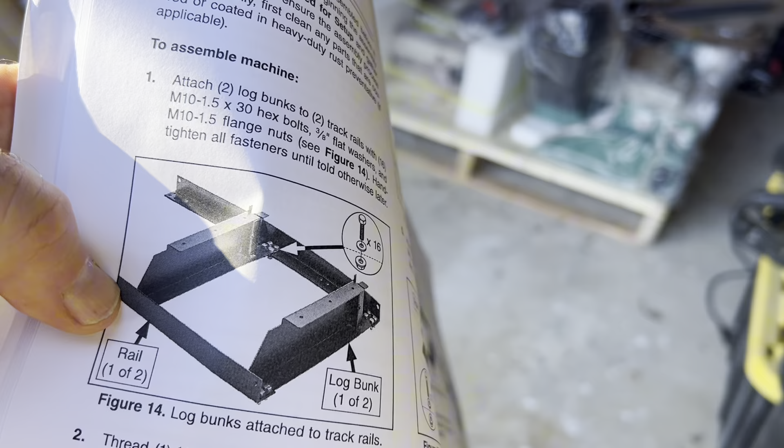All right, I think I got that laid out now. We can kind of see how things go together.

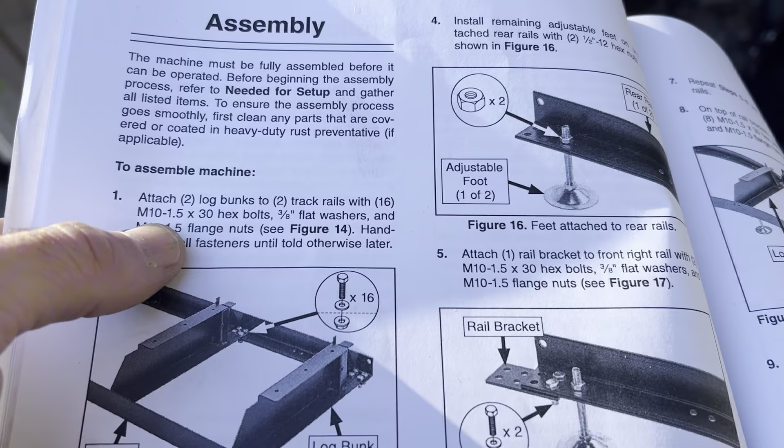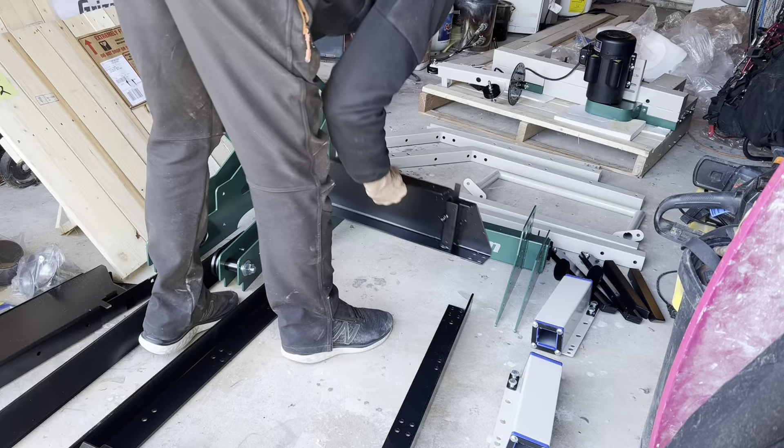Step one, we're looking for the 2 log bunks and 2 tracks with these bolts, the M10 1.5 times 30 hex bolts, and 3/8 flat washers. I'm going to place this one here and that one there.

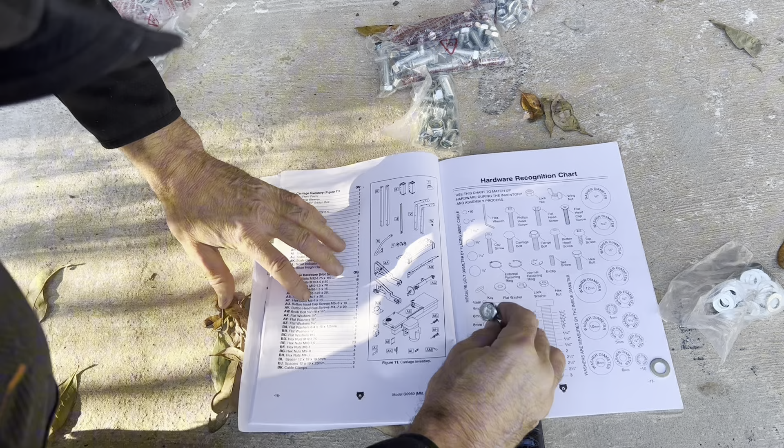We'll hang this over and do this here. Right now I'm just going to get them installed, and then I'll turn this back on. I've got to move this one to right there, so that's where that one's going to go in.

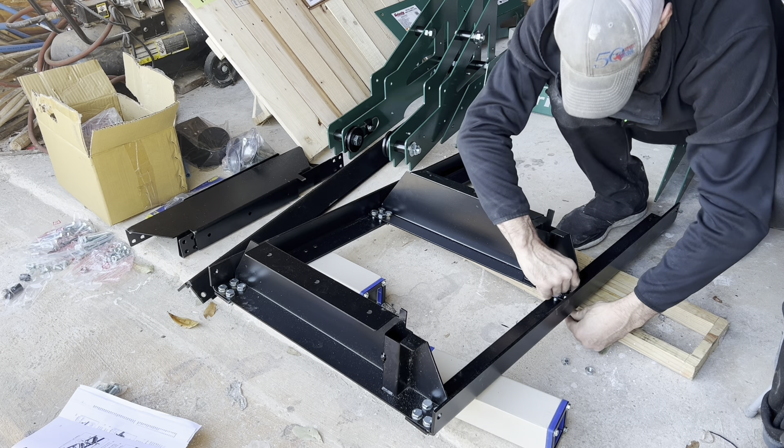I'm going to go ahead and do it now so I don't forget in that orientation. Expand from there. It'll make it easier to get these hand tight, so we'll do that real quick.

That'll also let us get those legs on there that need to be adjusted. We'll do that, and then we'll move to the next step.

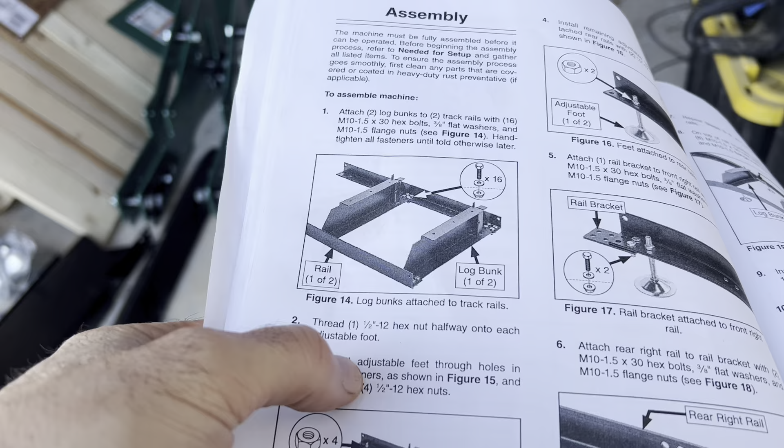This thread, 1/2 inch, 12 hex nut halfway onto each one. We did that, and now we need the adjustable feet. The nuts that we just completed have a single bolt.

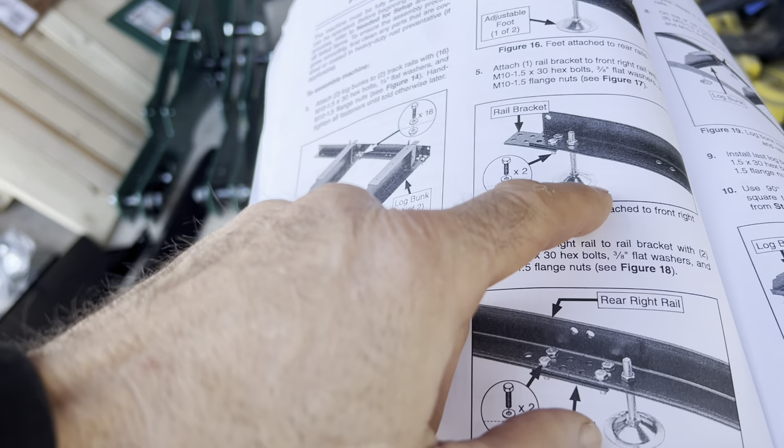So we're going to put that in there. This is going to be the adjustable feet.

I'm going to get my other jacket. It is getting cold out here.

Looks like there are 4 adjustable feet that go on this, and we have 6 here.

These are the nuts that adjust up, I believe. Nope, they'll stay there. All right, there's 4, so these other 2 will go somewhere else.

Let's find, I think those nuts are right here that go with it. Go ahead and get 4 of those. There we go. We may need more than that, so I'm going to put those right there for right now.

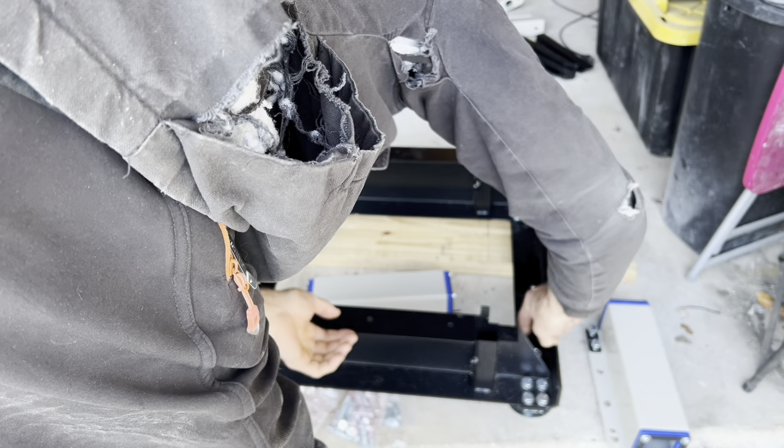I'm going to insert this here down to that bolt that's at the halfway point and run these other ones down. All right, good.

So we were looking for the rail bracket, and there's 2 of them, and they're in this container here. This needs to go underneath. We'll slide those on, put that nut on this one, and then do the same thing opposite side.

Those are not tight yet, just finger tight. We're going to take that other rail and just repeat those steps.

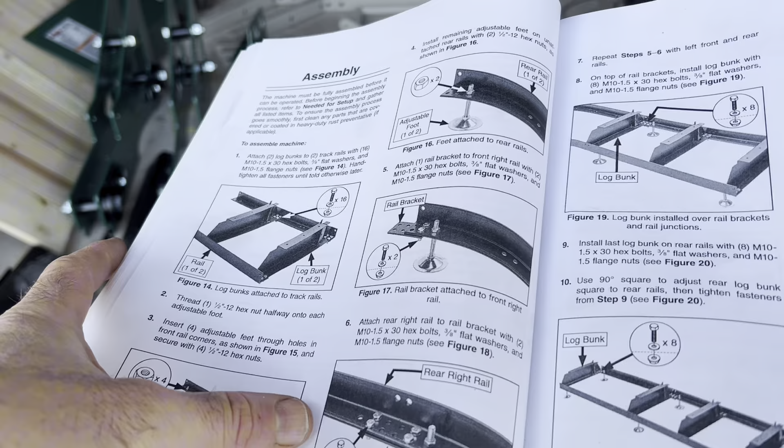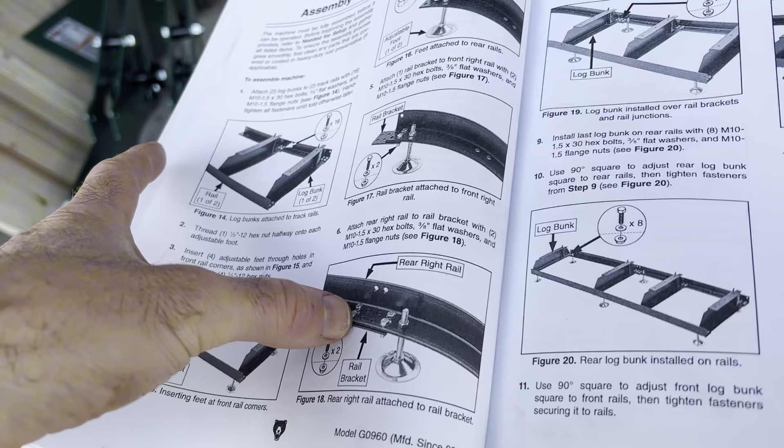Because that other log bunk is going to go right here on those 4. So we're going to bring these bolts as far away to leave 4 in the center for that log bunk.

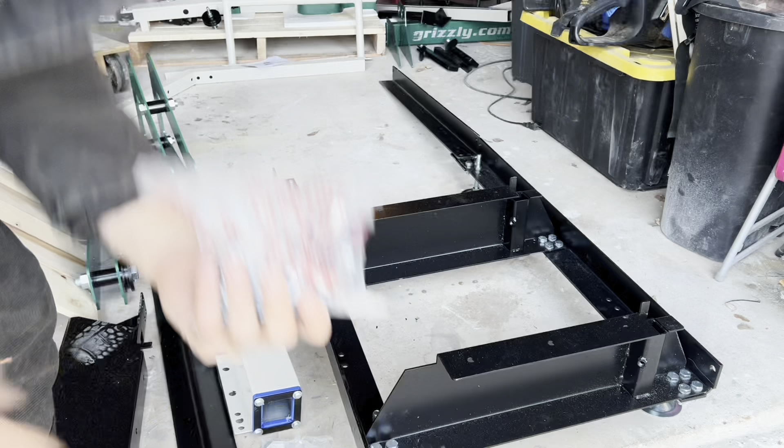These have to go, and we have to leave the 4 in the center open. All right, there we go. Here, and we're going to place it right around in there.

So we're going to install the last log bunk, same bolts, and then use the 90-degree square to adjust the rear. So we haven't done that. We'll go in and square all these up.

Right here, I want to do that before I put the log bunk on because it showed it in the illustration.

And then we'll run this other one down on top of it. We can use those to adjust later on where we're at, and the distance from this and the ground.

Let's go ahead and get that log bunk on there, same orientation as the others. Place that in there.

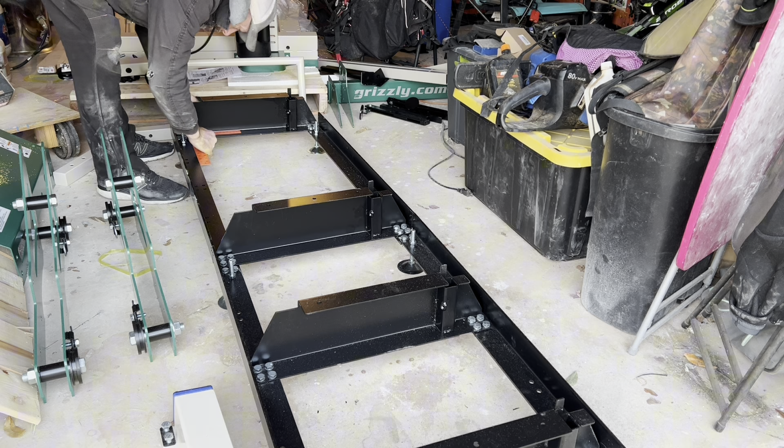Tighten it down, that one needs to be adjusted that way. May have to place them in here, I need something kind of flat. I want that to flatten out, and then we'll tighten that down once we get everything squared up. I've got a couple different squares, in case one doesn't fit I can use this other square, and we'll tighten those down as we get the edges square. That's probably where we're going to stop today because we're losing sunlight. We'll work on this some more tomorrow.

Top part of that bolt is a 17, bottom one's a 14. There we go. So I'm going to tighten these down. I have to use that as a check there. So I'm going to do this other side, get everything kind of squared up, and then as I do that I'll tighten them down. There we go, that's better.

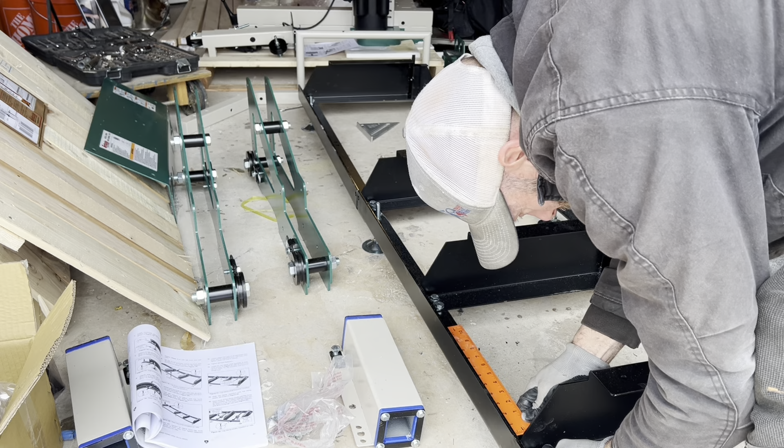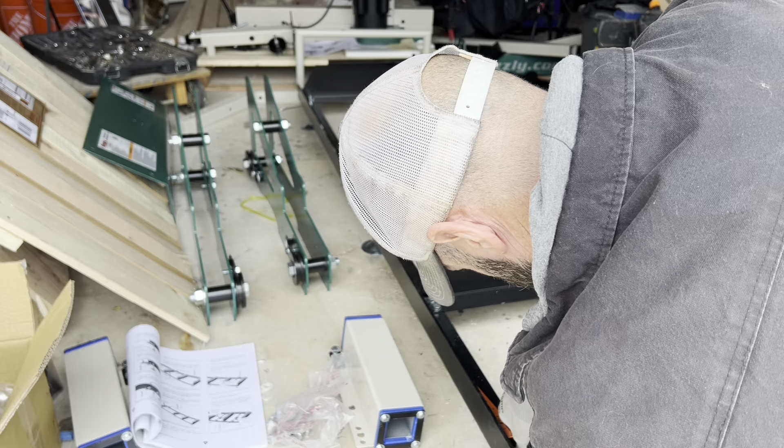So it'll take a little bit of adjustment to get these square, as square as we can. I'm not even doing these finger tight right now, just slightly tighter than they were. And then I'll try to get these squared up. Right there, that looks good on this. So I'm going to try to tighten them a little bit more by hand, see if that'll hold that position. And then I'll go get my wrench and do it here too. Yeah, that looks good, okay.

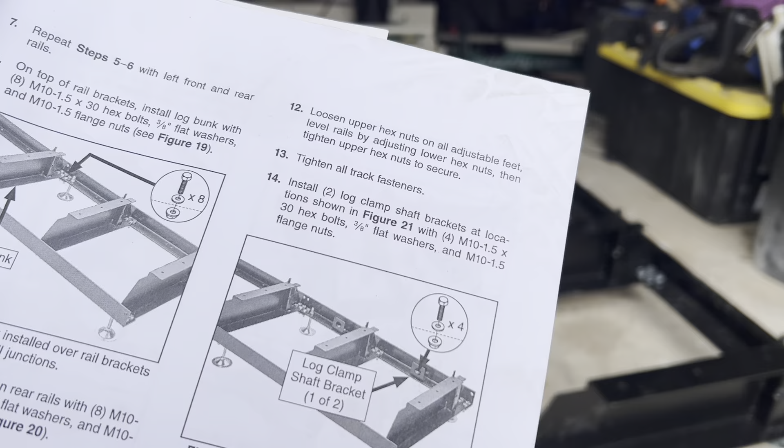I'll take a level when I get to its final location in the garage. So now we're going to tighten all track fasteners, which we did. We'll tighten those down later, the levels. So those adjustable feet, we'll tighten those down later, because like I said, we still have to move it.

Now we're going to take the log clamp shaft brackets on number 14, and it shows it in figure 21 where those go. So we're going right over here and right over there on these two that are closest to us, we're going to get those installed. The flange nut, and run it down here. Let me go ahead and tighten those down. We are getting really close to using all those up.

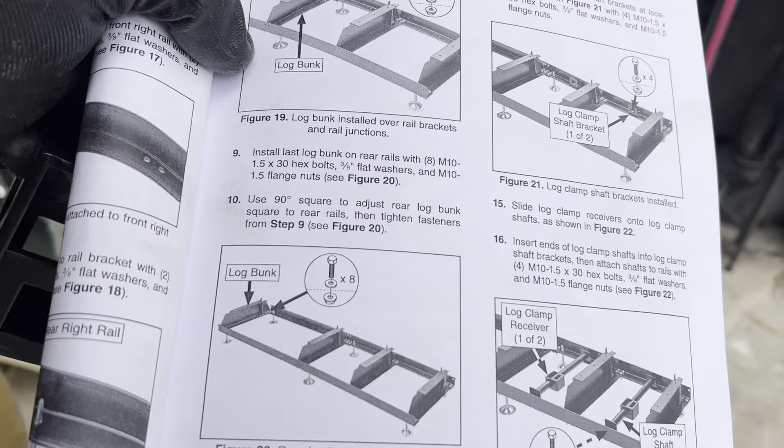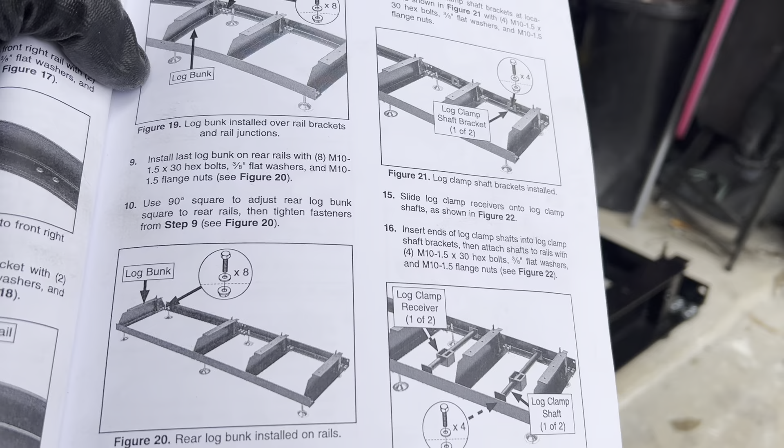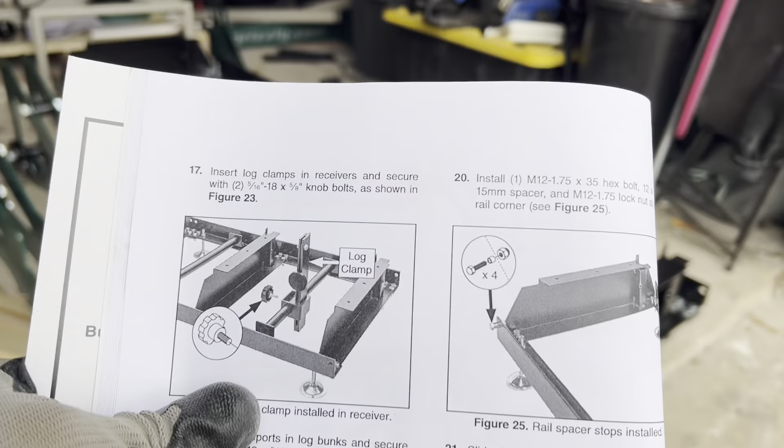We're going to take this log clamp receiver, one of two, same thing here, and we're going to run it on that clamp shaft. So that's not going to stay in place like it shows in the figure. That's going to slide in here, and that's going to go there. Same thing with those over there, because I didn't know how much I was going to have to move them around. We'll tighten these down in just a second. There we go, those are hand tight. There's figure 23 where my thumb is.

We're going to take these, they're shown right there. We're going to insert that log clamp like it's shown. I believe these go in there. Here, slide that down in there. That looks like that'll kind of hold it in place, but I'm going to run this down, kind of cinch it in, show you what it looks like.

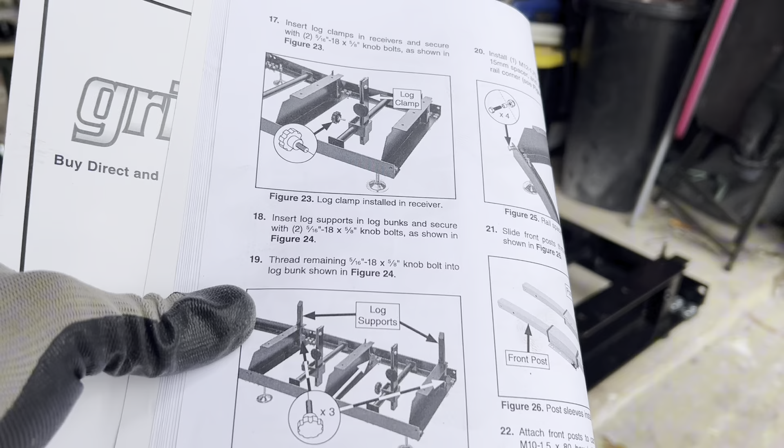So these are the log supports here, it says we're going to need 3 of these. We had 2 there, we're going to need 3. I don't see where the third one goes, but we'll figure it out. All right, so that's going to go in there, that's going to go in there, this one's going to go up here. That one's going to thread in. Looks like it's just squared tubing if I didn't get them.

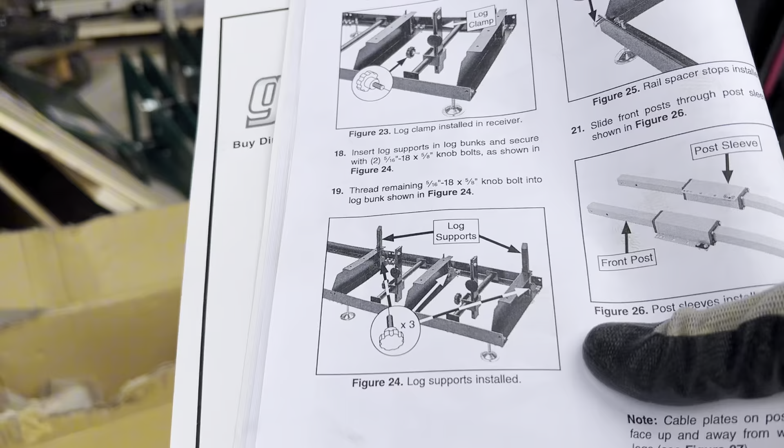I've got the nuts here. That goes in there. I'm going to put this one in for now until I find the other one, because it did say 3. But I think I should have a 4th one for this longer part down here, but I could be wrong. All right, not a big deal, I'll look around for the other one, see if I can find it. Because it only shows 2 here in this illustration, so maybe it only comes with 2.

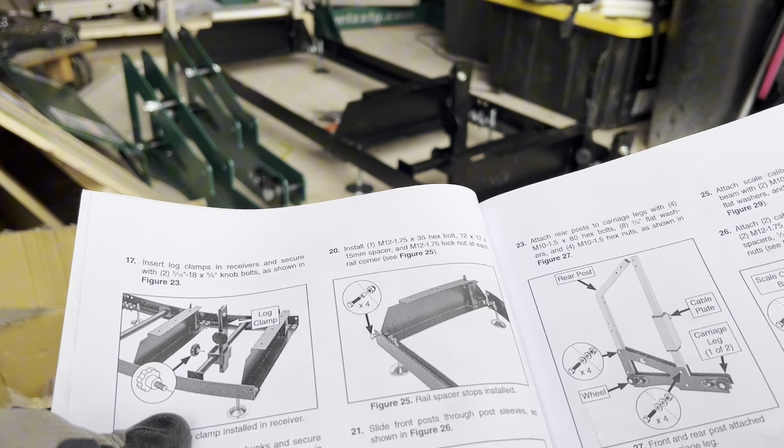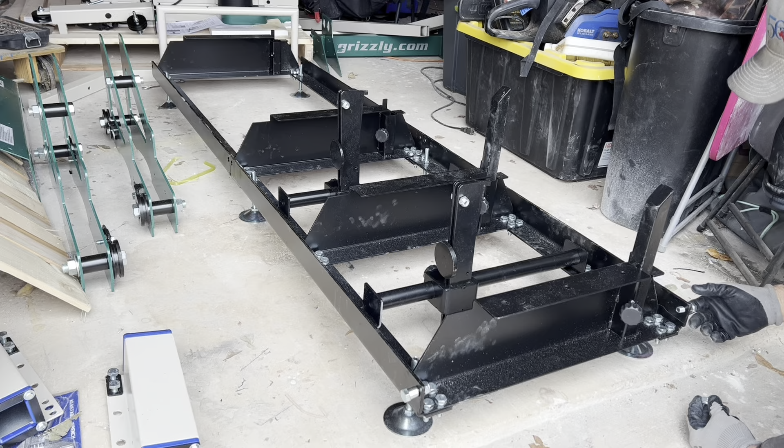We're gonna install an M12 bolt, looks like there's 1 of them, and it's gonna go further down towards the end, the one that doesn't have the other log support, the furthest one. Oh, right here, I bet you it's one of those. That looks like an M12, that's a locking nut there. So this one's calling for the M12 bolt, 35 millimeters long, 15 millimeter spacer, and a locking nut. Those were all in the same bag. Looks like there's some more right here. Bolt, spacer on the outside, nut on the inside. All right, spacer, nut, there.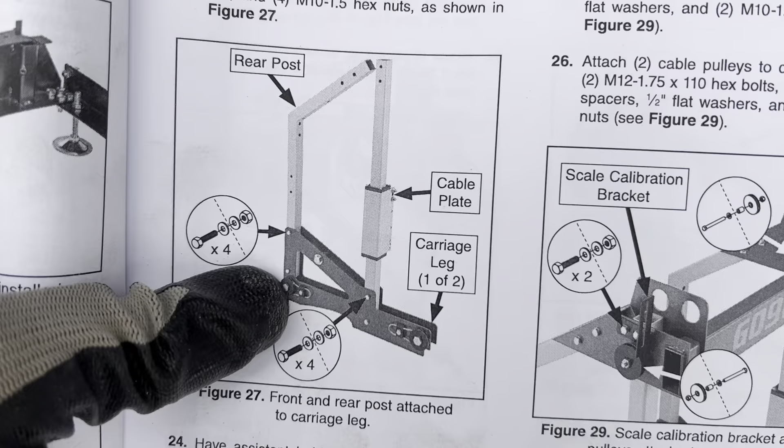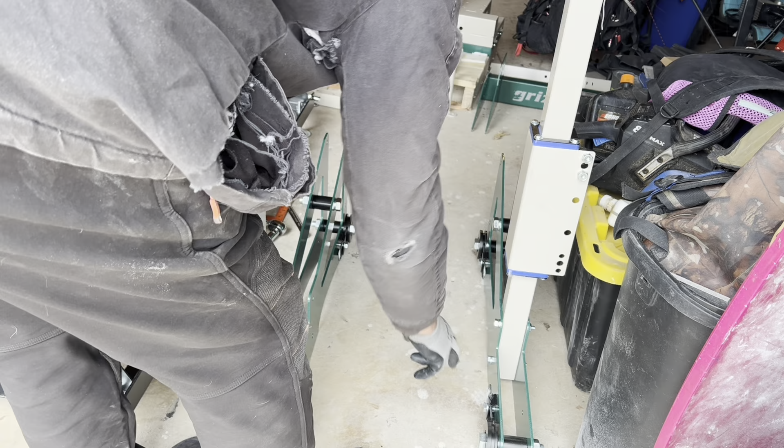We've got the majority of the base frame finished, and we'll run those down, we'll tighten those down. Got to go get these post sleeves. One that has the holes furthest apart here, the ones with the closer one, slide that down there. The 2 holes that are furthest apart on the bottom, on the base of that, right in the center, so that's a little bit easier to see. These bolts are on the opposite side from the cables. This is where the bolt started, it went through that direction. Slide that down.

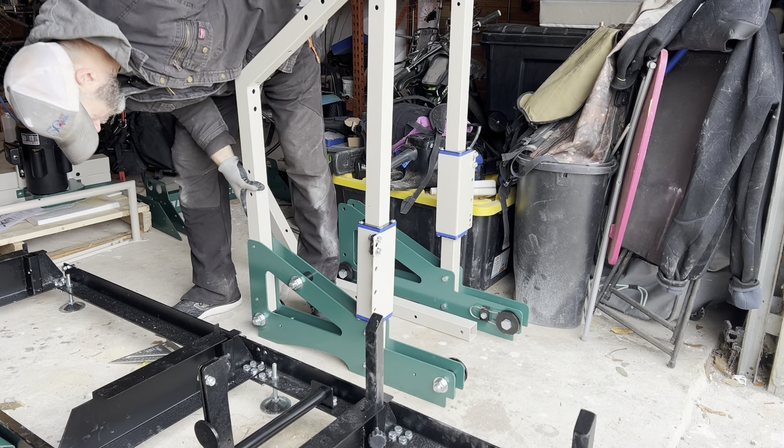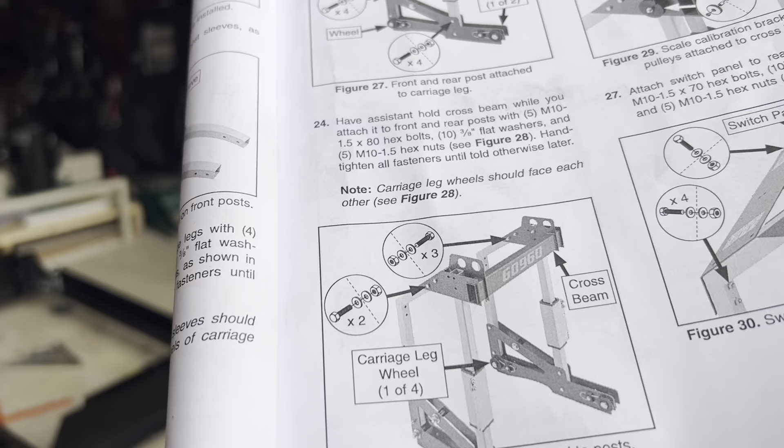All right, so now this says you need an assistant to help you hold this piece because it does look kind of heavy. I think it's going to go on like that.

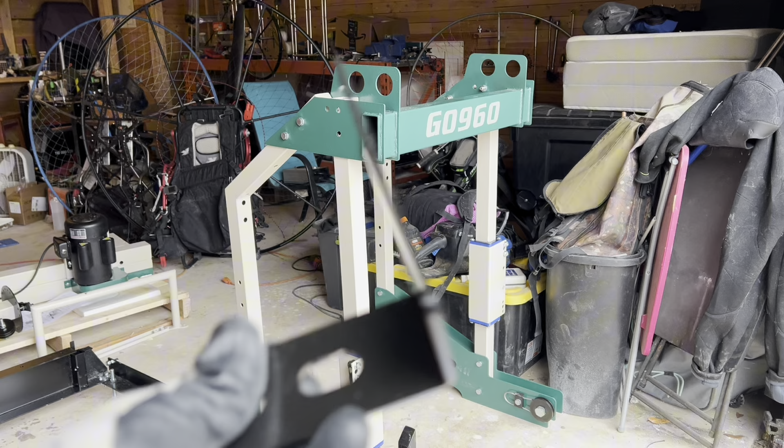So we just completed figure 28, which is step 24. Now we got to go attach the scale calibration bracket to the cross beam. All right, we've got the scale calibration bracket through there, and that one will go all the way through there. Cable pulleys to the cross beam.

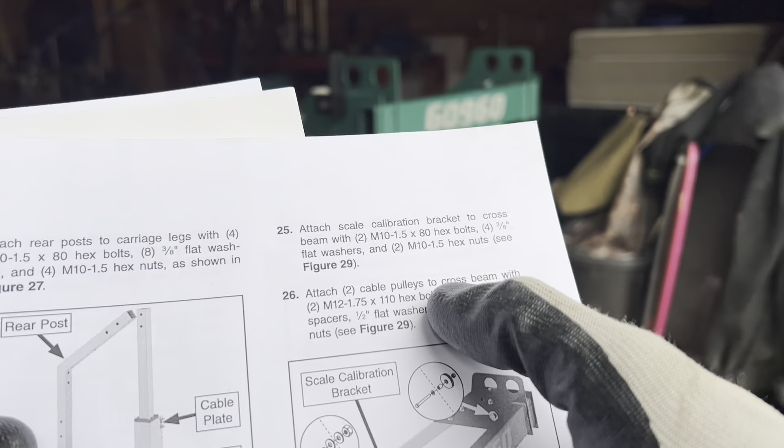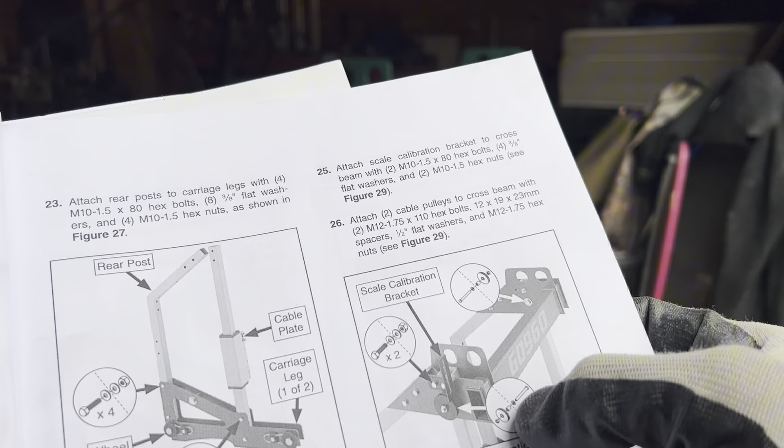These are going to be M12s. So if we go back to step 26, we need that M12 bolt, 110 millimeters long. But we need a spacer - I have to put that spacer on. So bolt with washer on this side, then the spacer, then the pulley, and then the nut.

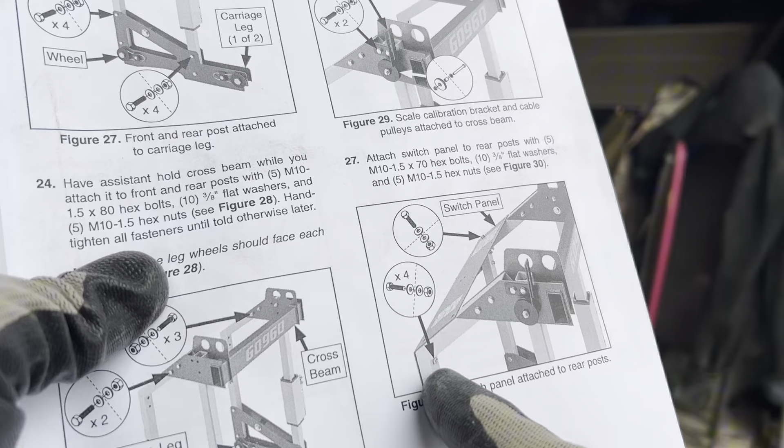On to step 27, we're going to put this panel on the back. You're going to have 5 of these bolts that are 70 millimeters long, so again M10s. I think they come in this pack here. That should be them, just so it kind of stays in place. That one goes there.

So we're going to attach a cable pulley to the right rear post. Spacer - that's that shorter spacer - pulley, and nut. It's going to have to go like that.

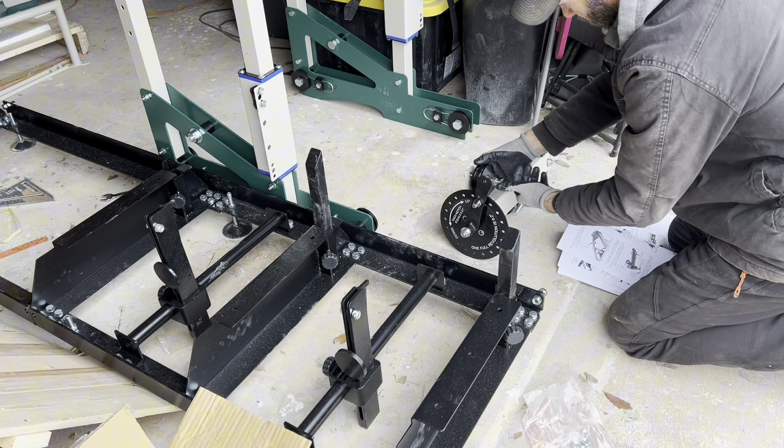So it says to remove that hex nut that has those 2 pulleys on top to this part, and take these 2 pulleys off, okay, and hex bolts from lift assembly. So these 2.

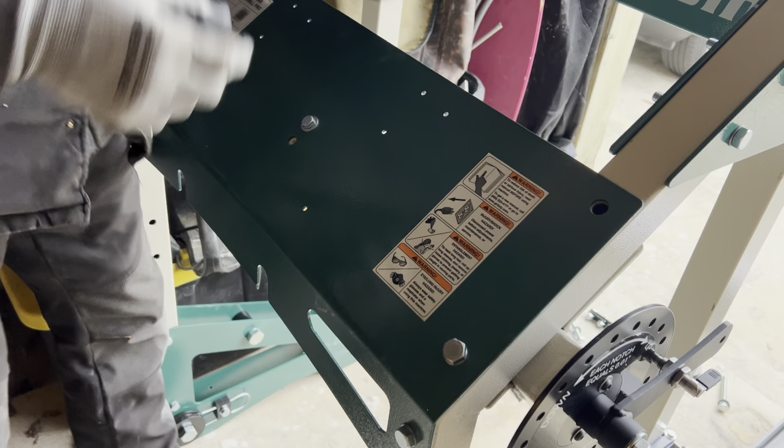All right, we'll put that back on. We'll get this as tight as we can by hand. There we go, so that's going to stay. So again, just hand tight right for now.

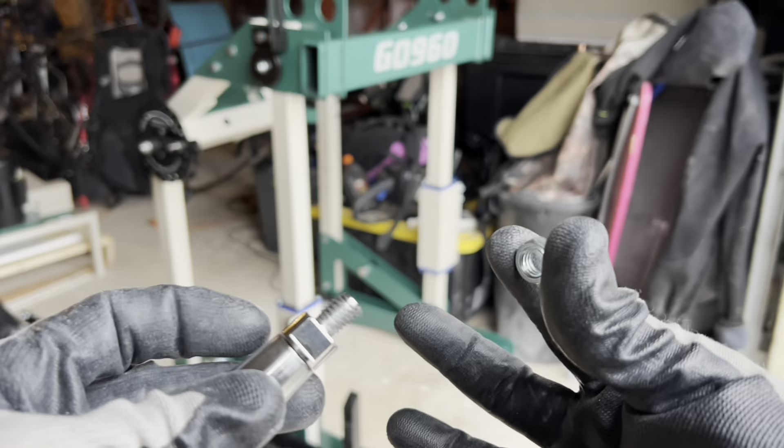I'm going to go back before I go too far and knock out step 30, and that's just putting this handle back in place, sliding that in. Runs down on the back part of it, putting that down.

All right, good, we got that back in place with the pulleys, and those pulleys are going to be right here mounted below. Bolt, spacer, pulleys, little washer that keeps the bolt from rubbing against the pulleys, it looks like. And then run that down. Hand tight for right now.

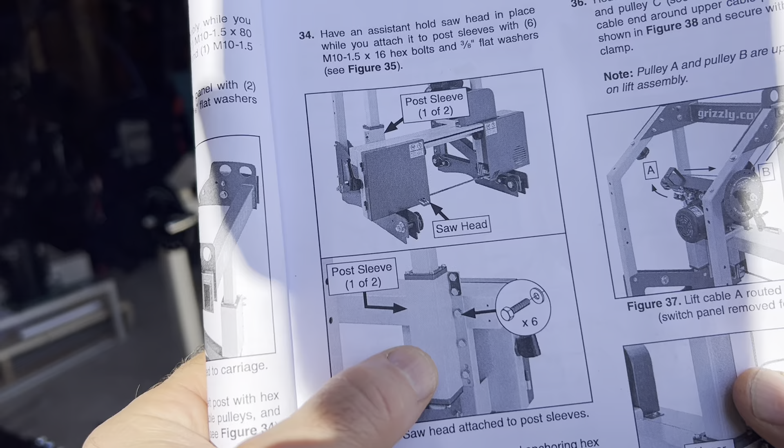Whew, all right, let's see how. All right, we're going to stop right there for today. We're going to have to get those aligned and bolted on.

Kind of in position - let me show you what I'm talking about here. So I'm on the back side of it, and what may be happening is this track here may be kind of turned out. I may need to bring it in some.

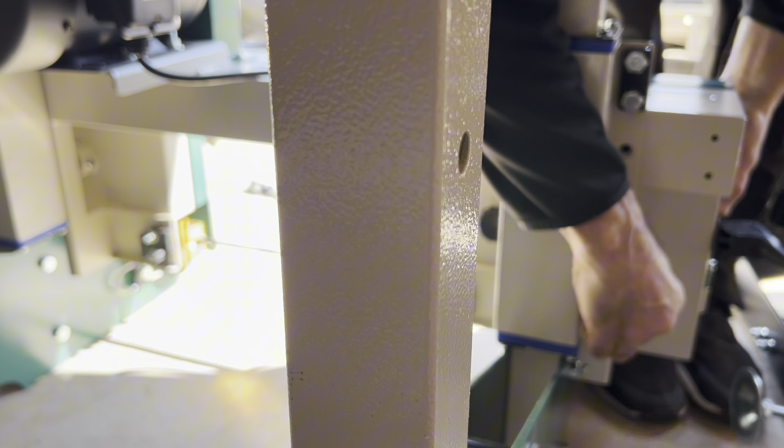And that might help align those bolts. Yeah, it did on that side. There we go, run that down. Run this one down, just make sure I'm not cross-threading anything. I should be able to run these down with just my finger. All right, this I am going to run down. There we go.

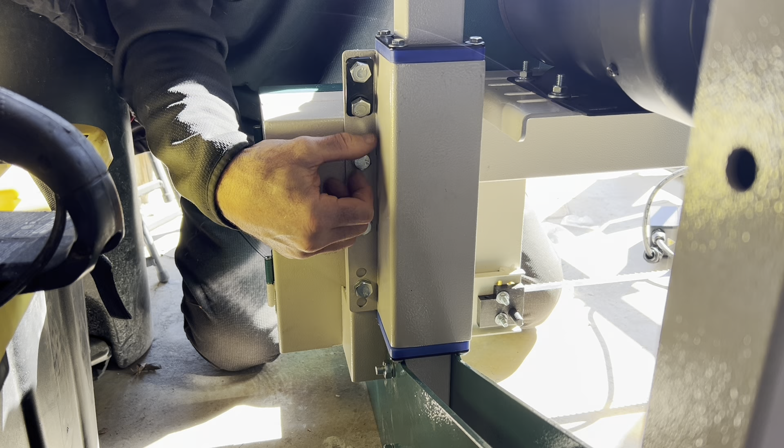All right, for right now, for what I need. Okay, so we got those tightened up. We're good to go, let's look at the next step.

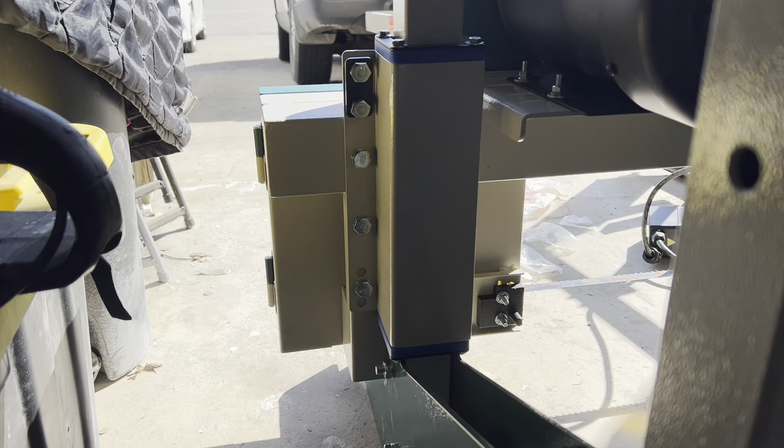So I've made a loop. In the illustration, it shows that these portions of the bolt - the head of the bolt - will go up. We got to put that washer back on. That slides back on, that slides there.

And now we're going to have to route this cable once we get this one on. So A's here, then we come back around to B. We go up to C, then we go down, and then we secure it to that side.

Through there, and I'll check and see if that one goes through the top one on this one too, or through the bottom one. Through here, and back down to this part right here. And that feels like where the bend is.

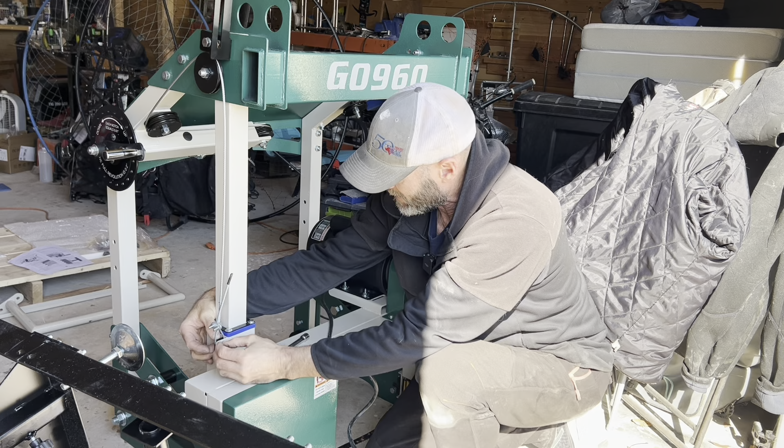And we may have to adjust the tension of that. Right now we're just getting it in place. I don't know if you can see that from there.

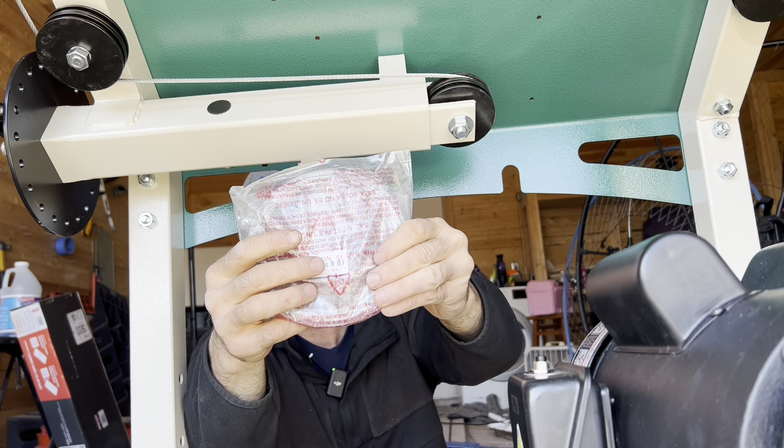Cable B, I'm going to run it through. I'm going to flip it around, run it back down there. And then we'll bring it to the point that they already had kind of bent, try to get it right there at that same setting.

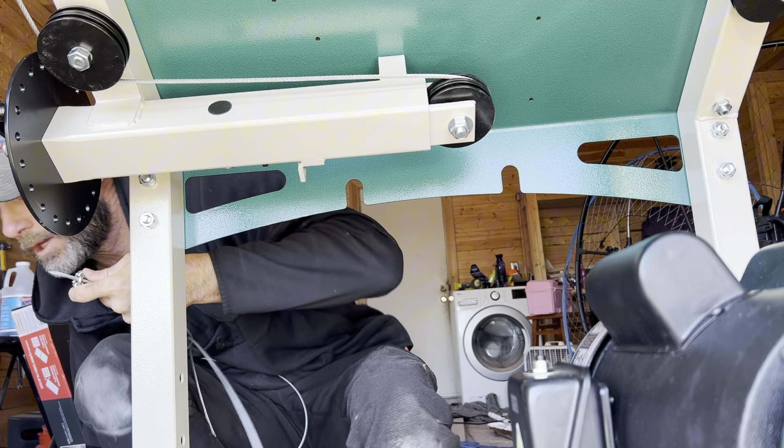And then I'll run that down. I got to get my tools. I'm going to have to wrap around here, but I've got to look at the direction it's going to go. I may have to shorten that.

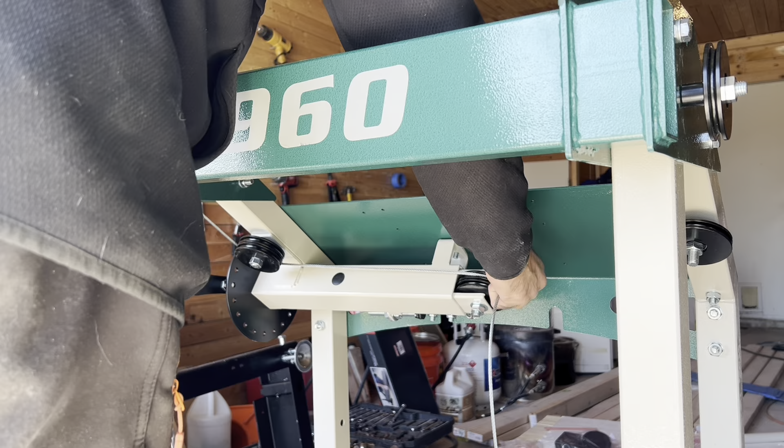Around D, we're going to come around here, go around E, which is the bottom one. We're going to come across and go F. We're going to come up and go G. And then we're going to come down here and we'll put that other cable clamp on.

That feels good. All right, so this, we're going to install the push handle.

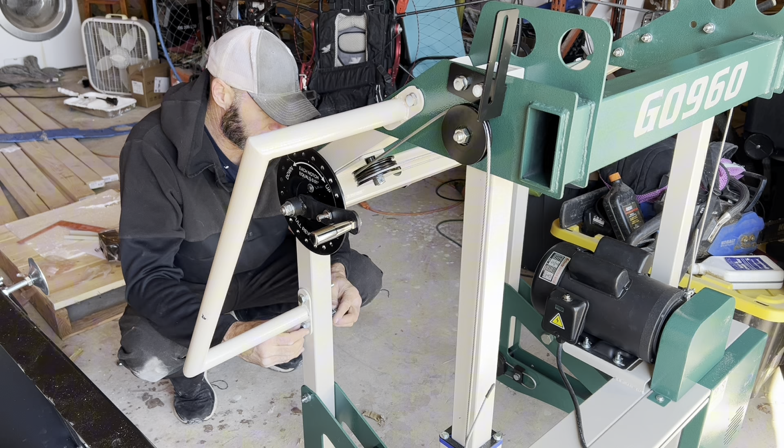All right, so we got that. I'm going to go ahead and tighten some of these down since we got those on. That should be a 17 millimeter. We're going to have to go around and tighten all of them, but

We'll go ahead and get some of these snugged up. We're probably still going to have a lot of adjustment on here because I doubt that I got everything tensioned just right, but we'll find out later on. Right now, let's just get it assembled, and then we'll do all the tensioning and everything else later on. There we go. All right, got that tightened down.

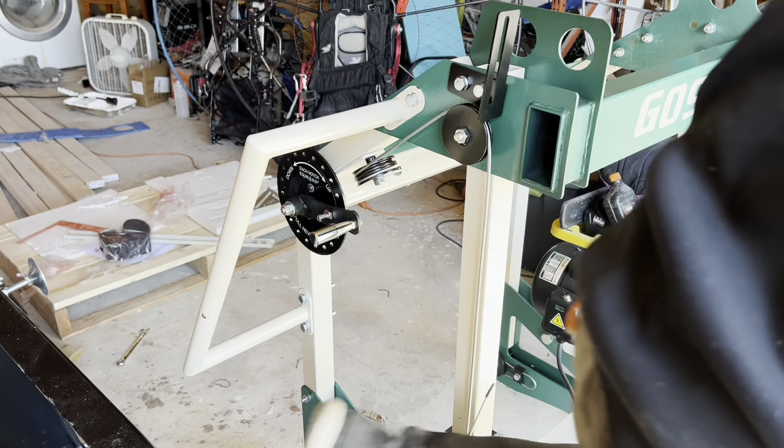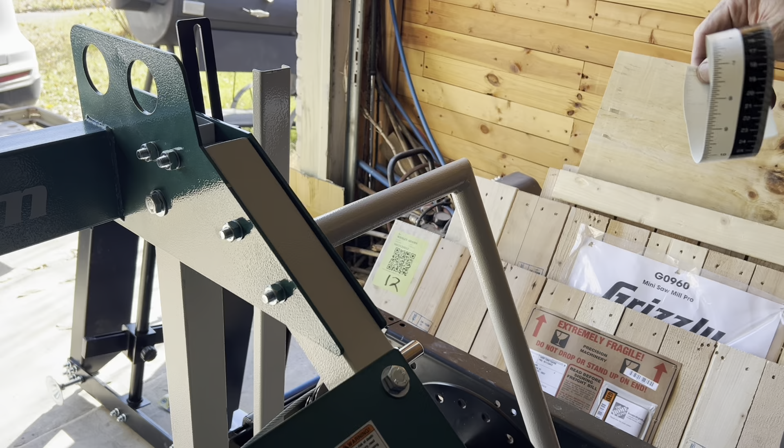Six millimeter, 30 millimeter long. Right here at the very tip top, and then went down. All right, so now we've got the scale calibration bracket, and I'll show it to you.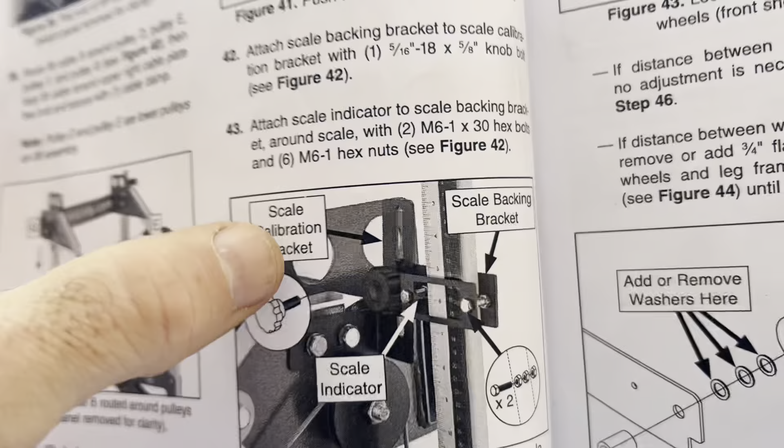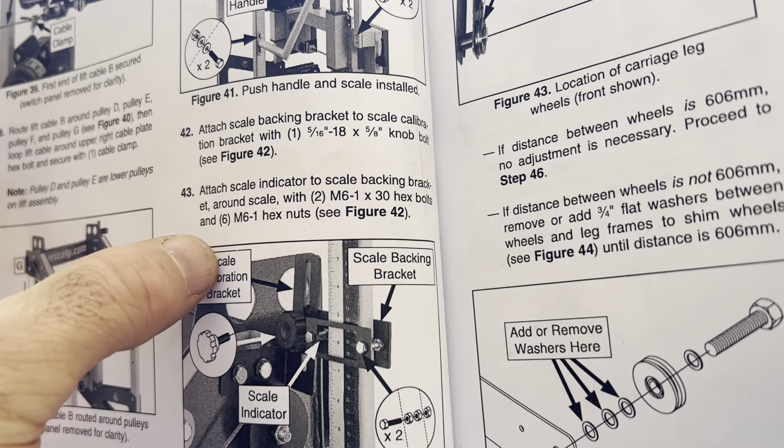Right here we've got this calibration bracket with that knob that's going to go to the inside, where you see the scale calibration knob right here. Scale indicator. We've got these two M6 30 millimeter long hex bolts, and then we'll have the M6 hex nuts, and it shows you how those go on.

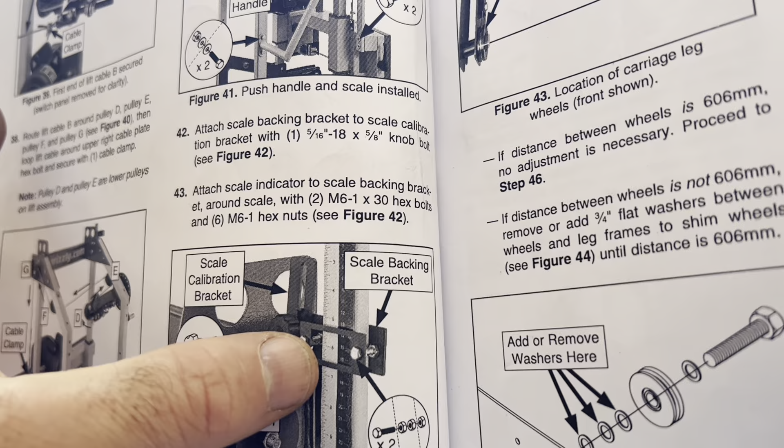So right here is how they're going to be installed. So you see 3, right there, times 2. We're going to do that twice for this - one on that side of the bracket, one on the other side.

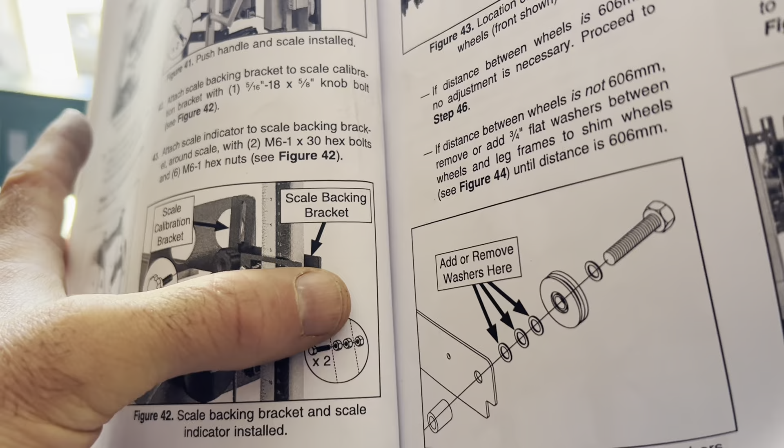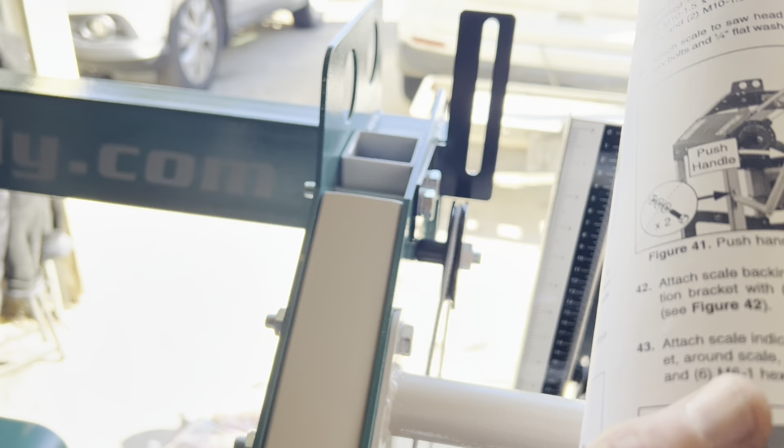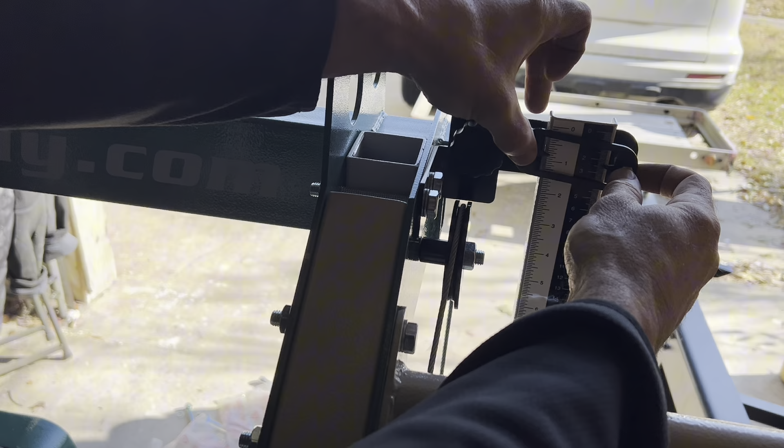All right, so we're going to start there and get this adjusted. Something looks way off here. Hang on. But I think that it is. There's that - M6 bolts, the ones that are 30 millimeters long with a nut on each one. I think this will even slide up and down a little bit more than it is, and then we can lock it in place.

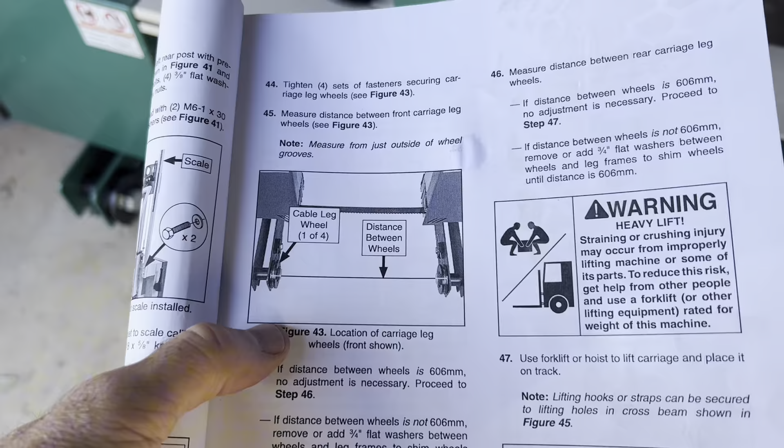On the cable leg wheels, it's 1 of 4, and we want these to be 606 millimeters. I had to look that up, and we are shooting for 23.9 inches, and I think it's in this track here is what we're looking for.

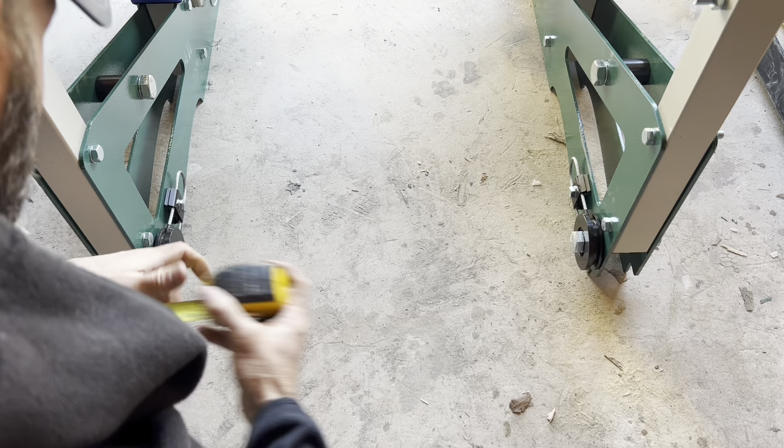This edge here to that edge there, I am there. These need to be the same length or same width apart. Yep, I think we're there.

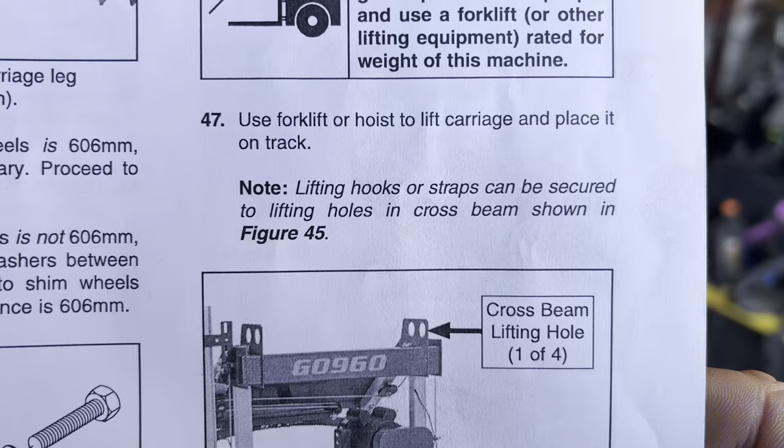In the instructions it says that it's super heavy to lift and that you may need a forklift or hoist, which I don't have. There's a place where you would use the hoist to lift it up. The stops prevent it from running off the track.

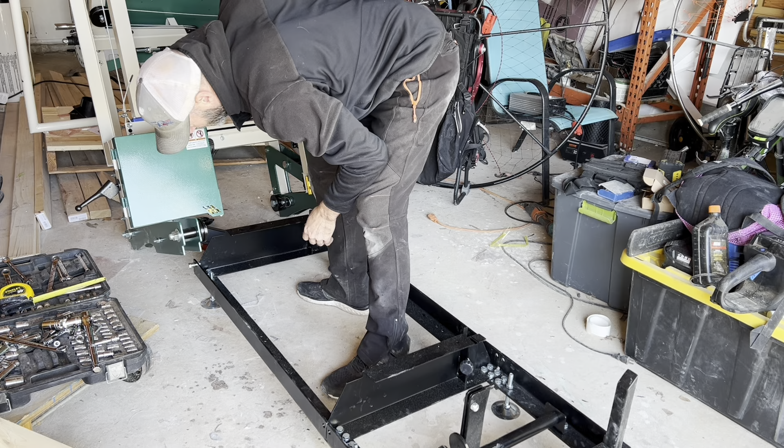So I think I can lift this up, and I might - if I can't pull this underneath with my own hands, which I can - have to, I guess. If you couldn't do this step like I'm doing right now, you might be able to put some 2x4s underneath it.

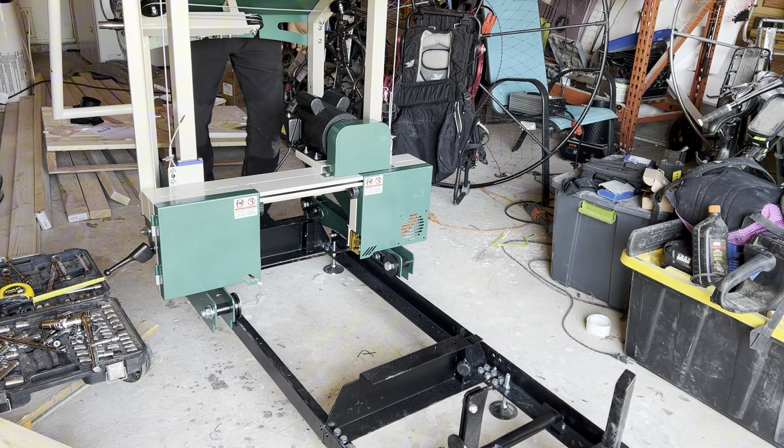Right now I'm just going to try to line these up as best I can. That one on there. Now, before I drag all the paint off of it, I'll lift this one up. And there we go. We are in business now.

Yep, those are on there. Our measurements were correct. I do need to tighten bolts up on this portion, but we're good. Yay.

We've got a dust port that we can install. I'm trying to look to see where it'll go. With the Allen head on them. Gonna insert those.

So we're gonna insert this one. Insert this one. And this one. So right now I'm just going to hand tighten those, and I'll come back with an Allen wrench to tighten those down.

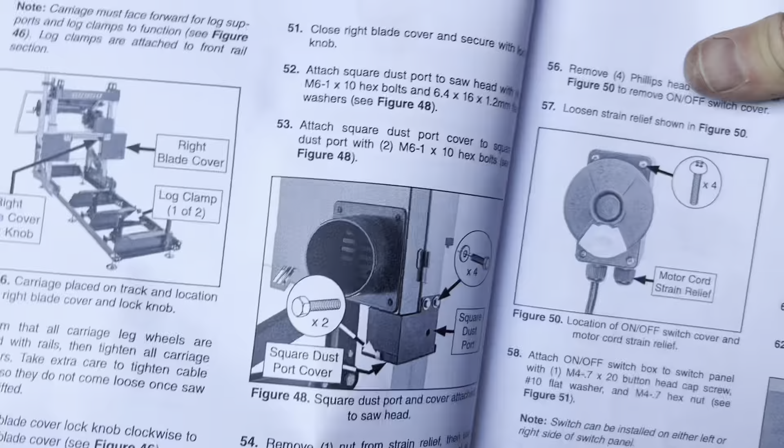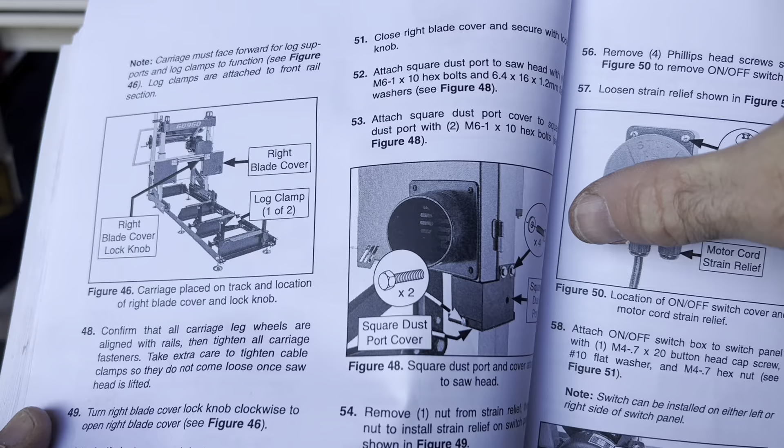And right here in step 52, we're going to install 4 of these M6 bolts that are 10 millimeters long with the flat washers that come with those. One like that. I'm going to close this so you can see what I'm doing. I'm going to put these 2 on.

Get that to kind of pinch in there. There you go. And then this snaps shut. There's one in the back, one in the front. So I'm doing the back one, same on the opposite side.

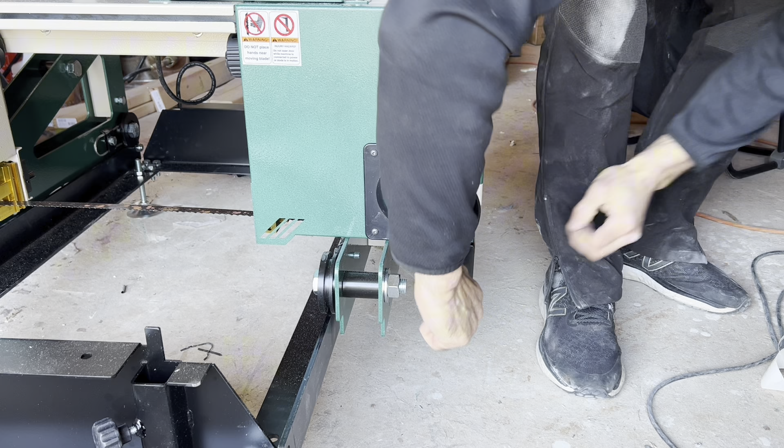The reason it's moving right now is I haven't run those down. Put that on. All right, we'll run that one down too a little bit more. There we go.